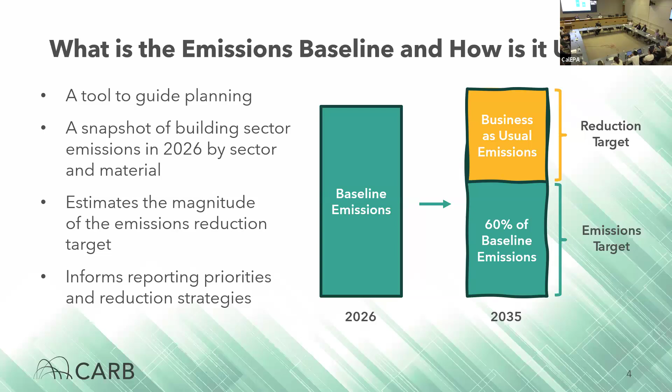Important: the baseline is a sector-wide emissions estimate. It is not an average or benchmark carbon intensity of specific building materials. Similarly, the 40% net reduction target does not mean that each building material will have a 40% CI reduction target. Material-specific benchmarks and material-specific reduction targets are a separate concept that will be discussed in the future.

Before we dive into the technical aspects of baseline estimation, let's briefly revisit the program's previous public engagements. Our first workshop was held in September 2024. In this workshop, we introduced the concepts of building decarbonization and embodied carbon and outlined potential program structures.

At this workshop, we received over 80 questions and comments on topics including EPD and LCA collection standards and methods, whether data must be specific to a facility or a product, which entities will be required to report, opportunities for standardizing and streamlining reporting, LCA accounting practices and system boundaries, the scope of covered building materials, and stakeholder education and outreach. Recordings and slide decks are available on CARB's website, and written comments were accepted after each workshop.

In March 2025, our second workshop expanded on the program's scope and addressed questions raised at the first workshop. Staff introduced data standards for EPDs and LCAs, outlined manufacturer and project reporting requirements, and provided an initial recommendation to develop a baseline using a top-down EEIO approach.

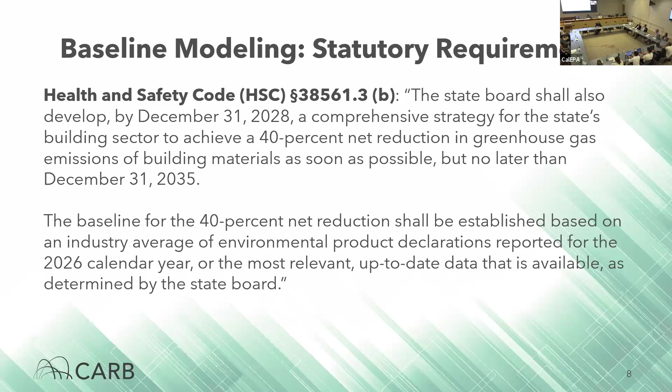The statute provides two options: an industry average of EPDs reported in 2026, or the most relevant up-to-date data as determined by the state board. That second clause, the most relevant up-to-date data, is important. It gives CARB flexibility to utilize alternative data sources and information in lieu of EPDs to establish a baseline.

The statutory language also uses some key terms that require definitions. These definitions should be familiar to many folks here, as similar definitions were presented in a prior workshop. These definitions have been updated to incorporate comments that were received since the last workshop.

Staff is considering defining building material as a physical product or system that is used or produced by the building sector, and typically used in the construction of buildings and infrastructure. This definition includes all end uses, for example, all concrete used in California, regardless of project type.

Similarly, staff is considering defining building sector such that it includes all economic activity related to product manufacturing and construction, renovation, maintenance, design, and siting of buildings and infrastructure. This reflects a comprehensive life cycle perspective.

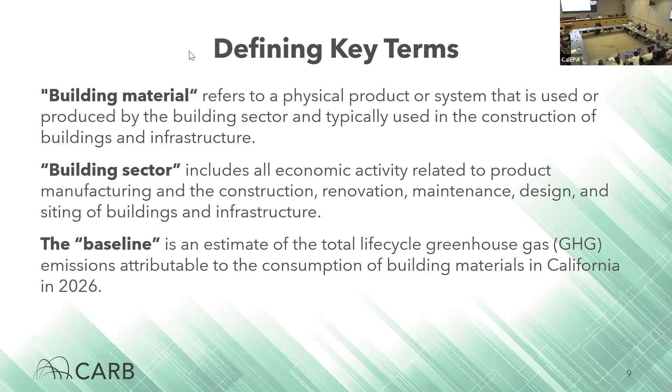Finally, staff have proposed defining the baseline as an estimate of the total life cycle greenhouse gas emissions attributable to the consumption of building materials in 2026, using the most relevant up-to-date data.

There are a variety of emissions accounting data sources that could be used to estimate the baseline. One emissions data source could be greenhouse gas emissions aggregated on a facility-specific basis. This sort of data is reported to governments annually and accounts for emissions from the total production of materials from each facility required to report.

Another source of data is product-specific life cycle assessments, which provide detailed emissions estimates for each unique building material for which a detailed life cycle assessment has been completed.

An emissions accounting approach that relies on product-specific LCAs could make use of EPDs and EPD reporting. However, reliance on EPDs poses several major challenges.

First, EPD availability and data quality is uneven, leading to comparability and consistency issues. Not only do many unique building materials lack EPDs, but they are also not held to universal, detailed standards for data transparency, verification, environmental attribute accounting, system boundaries, data vintages, or emission factor data sets.

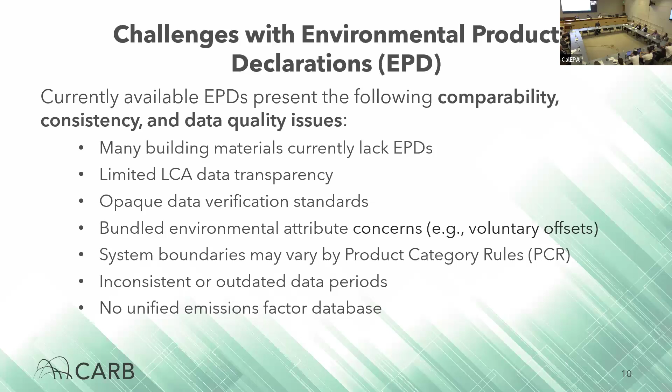Because of these limitations, staff flagged significant concerns with relying on EPDs to develop a baseline to estimate the 2026 emissions that may be attributable to building materials.

After weighing the options, staff proposed using an emissions data source corresponding to facility-specific rather than product-specific data. This has led to selection of an EEIO model, specifically US EEIO, as the starting point for estimating baseline greenhouse gas emissions. The pros and cons of this approach, shown in the table, were discussed at the March workshop.

As shown in this table, the main benefits of the US EEIO modeling approach are that the model provides a complete picture of building sector emissions with minimal omissions or double counting. This concern would exist for most bottom-up modeling approaches using EPDs or other LCAs.

One drawback of the US EEIO approach is that its data sets are fully updated only on 5-year intervals, and the EPA has signaled that it will no longer maintain US EEIO. However, development and updates to US EEIO are expected to continue through a consortium led by Stanford University and private partners. Data vintage concerns are not unique to US EEIO data sources, but also extend to EPDs, which may have primary data that is up to 5 years old, as well as significantly older background data.

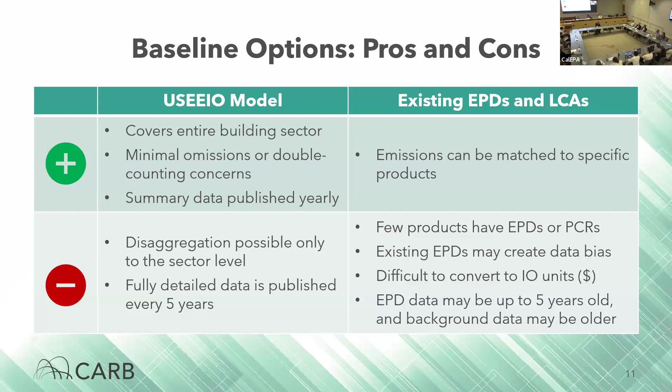So, what does this EEIO approach to estimating baseline emissions look like in practice? Conceptually, the total economic demand for California building materials is multiplied by their sector-specific greenhouse gas emissions intensity. The greenhouse gas emissions intensity is derived by aggregating facility-specific data. These data come from facility-specific measurements that are reported to governments and attributed to specific industrial sectors. Each sector's aggregate greenhouse gas emissions are mapped to the overall economic output from that sector, using government-issued data sources. The result is a statewide estimate of emissions attributable to building material usage in the state.

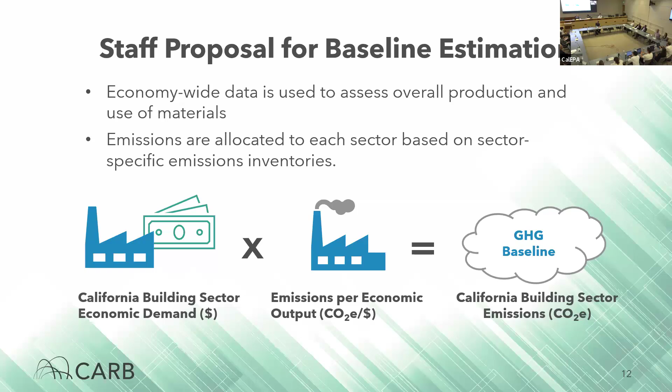A key analysis choice is deciding which life cycle stages to include. Staff propose covering A1 through B5, which includes raw material extraction, manufacturing, transport, installation, and ongoing maintenance and replacement for buildings and structures. Stages beyond B5, like operational energy and end-of-life disposal, are excluded, as they are likely to add significant additional modeling complexity and account for only a small increase in additional emissions, with little opportunity for the building sector to control or reduce.

I will now hand this presentation over to my colleague, Jeff Kessler, who will discuss input-output modeling in more detail.

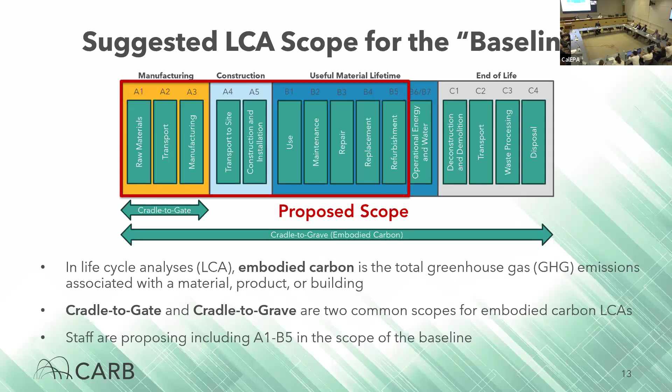Good afternoon, everyone. I'm Jeff Kessler, the staff air pollution specialist in the Embodied Carbon Programs Analysis section. The first part of today's meeting reviewed the key considerations for developing a baseline estimate for building material emissions. All material from today's presentation has been posted online. Some of the material presented today has been repeated from prior workshops. We encourage all of you to familiarize yourself with the two prior public engagements if you have not already. Recordings from these past workshops are also available online if you'd like to revisit them.

I'm now going to cover some material to further set the stage for how CARB staff intend to use the baseline and the methodological underpinnings for the emissions assessment work we are doing to establish the baseline.

First, it is important to understand the context for how the baseline will be used and how it relates to the data we plan to start collecting from entities that will be required to report to our program. The baseline serves two important roles for the Embodied Carbon Program. First, it helps to reveal the products or industries with the highest emissions, where emissions are concentrated in the building sector. This helps CARB staff identify key reporting and submittal requirements that will ensure that the highest emission subsectors and materials are being reported to CARB.

Relevant and accurate reporting is essential for CARB to track progress toward any future emissions reduction targets that may be established. Second, the baseline modeling approach being developed by staff provides sector-specific emissions intensities that are relevant to specific building material industries. Due to this level of disaggregation, the baseline and baseline methodology will be used to help identify how different policies, programs, and future regulations can be used to achieve an overall 40% net reduction in greenhouse gas emissions for the building sector.

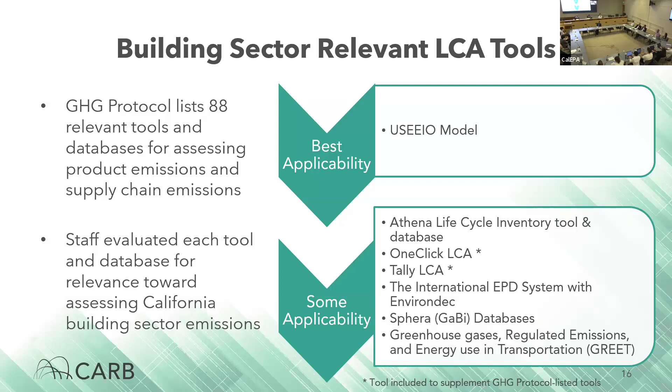The economy, and perhaps the slide, is strikingly complex. To estimate the life cycle emissions associated with building materials, it is necessary to understand how different energy and material flows across the economy and is used to ultimately create a building or structure. Input-output analysis is a powerful approach that has been developed to understand and to quantify the interconnectedness of the economy and the various sectors. Building a house, for example, involves not only procuring lumber and concrete, it also involves the production of cement from the mineral products manufacturing sector, aggregates associated with mining, and electricity procured from electric utilities. Each of these upstream activities has its own procurement pathways associated with their upstream emissions.

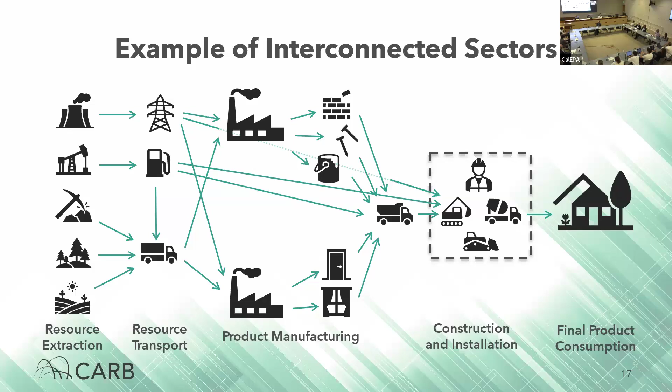Input-output analysis is a mathematical approach that is used to map the overall relationships for interconnected industries. When input-output analysis is incorporated into a life cycle assessment framework, it can help us better quantify both the direct and indirect emissions associated with building materials used to construct buildings and structures. With that context, let's look more closely at how input-output analysis works and why it provides such a strong foundation for estimating an emissions baseline.

An input-output model captures the ripple effects of an economy. That is, the output from one sector is contingent on a very complicated set of producers providing different goods and services that will all need to change their own levels of production to satisfy an increase in demand from a different sector. Think of it as a network of transactions. Sectors buy inputs from each other, transform them, and sell outputs to consumers and other customers. These transactions are called inter-sector flows. For example, natural gas sold to the cement manufacturers is one such flow.

Not everything produced in the economy ends up being consumed as final demand. In fact, most economic outputs end up being consumed by other businesses as intermediate goods to create additional goods or services. Final demand refers to something very specific and only covers the set of goods and services that are not used as intermediates. Final demand is primarily carried out through consumption by private households and government purchases. To keep these flows organized, IO models rely on classification systems like the North American Industry Classification System, or NAICS. This standardizes how industries are defined and classified across the economy.

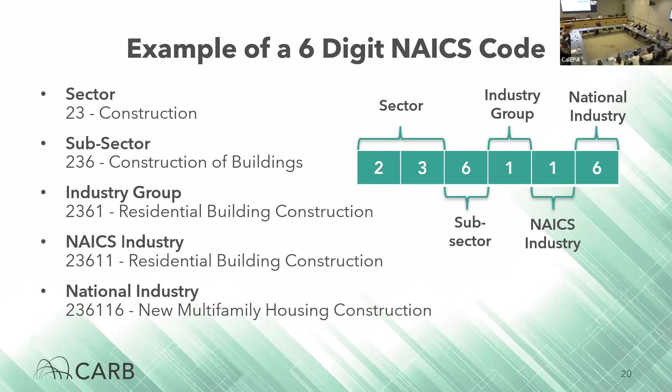NAICS codes classify businesses by the work that they do. The first two digits represent broad sectors, and each additional digit adds specificity down to individual industries. Government uses NAICS to collect economic data, and businesses use it to benchmark markets and qualify for different contracts. The system is updated every 5 years to stay relevant to new industries. NAICS is a key system used for aligning emissions data with the right economic sectors in the environmentally extended input-output model, which we will be discussing in more detail in just a little bit.

The IO model framework was developed by a Nobel Prize-winning economist, Wassily Leontief, who developed the first systematic method to trace the interdependencies of a complex global economy.

Input-output analysis is all about connecting the dots between industries and quantifying the flows of goods and services across the economy. For example, producing a car isn't just about the auto sector. It involves steel, energy, transportation, and electronics, which are all industries that are reliant on other industries in the economy to function. IO models capture both direct and indirect inputs, giving us a full picture of the resources that the economy must provide for a given sector or industry to continue to produce goods and services.

Today, CARB and other government agencies rely on input-output models for economic forecasting. This includes things like estimating the number of jobs that may be created or destroyed by a given program or policy. CARB uses tools like REMI, an input-output modeling tool, to meet the requirements of the Administrative Procedure Act to quantify the economic impact to the state and its businesses that a given policy might have.

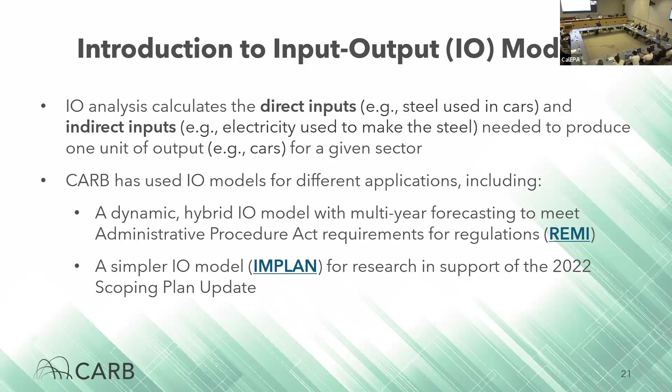CARB has also made use of the IMPLAN model, another input-output tool, to evaluate and estimate health and other impacts that different scoping plan scenarios may have. The IO modeling methods use linear algebra to mathematically quantify the economic flows between sectors and to determine the overall input needed for the economy as a whole to meet the production needs from a given sector.

The economic data used for input-output modeling starts as a large table and is transformed into matrices that describe how much direct input each sector needs to produce 1 unit of output. Total output tables show the gross value of production from each sector, or the total economic output that a sector has produced in a given year. This includes both intermediate goods sold to other sectors as well as final goods sold to consumers, governments, or for export.

Intersector flow tables map the transactions between sectors. For example, they quantify how much the construction industry purchases from cement, steel, or insulation manufacturers. This direct input is quantified based on economic data associated with purchases made by companies that make up the sector. These data are collected by the federal government. Final demand tables isolate end-use consumption. These tables track how goods and services are consumed by households, government, and exports, separating final demand from intermediate use by other industries.

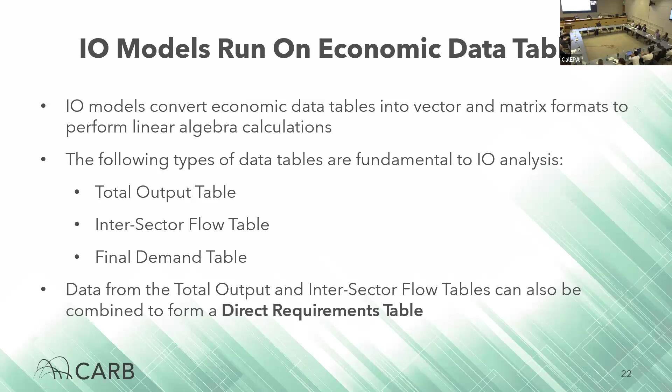The direct requirements table, also known as a technical coefficients table, standardizes input needed per single unit of output. It shows for each sector how much direct input is required or purchased from every other sector to produce 1 unit of output. This table is essential for the linear algebra that quantifies both direct and indirect economic and environmental effects. The next several slides will break this down in more detail.

The direct requirements table shows the direct inputs needed from other sectors that are necessary to make $1 of output for a given sector. It is easiest to think of this as the line item purchases that a business ultimately needs to operate on a day-to-day basis. For instance, construction entities making commercial structures will need to procure lumber and other goods. There are numerous other direct inputs that will be necessary for a construction entity to produce their economic output, typically a structure or building. Similarly, a lumber manufacturer may also require dimensional lumber to maintain structures that are fundamental for use to conduct its business, among many other outputs from other industries.

The direct requirements table normalizes the total demand for inputs by the total economic output for each industry. That is, the total receipts or direct inputs to a sector is divided by the total economic output from the sector.

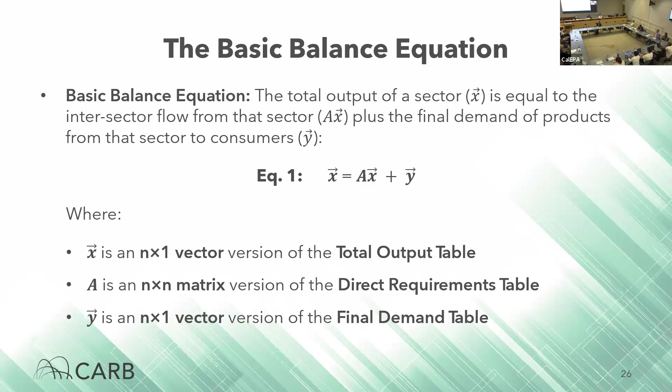When taken all together, this equation states that the total output from each industry in the economy must be equal to the total demand for intermediate goods, as well as the total demand for goods that are sold directly to final consumers, such as private households and the government. As may be evident from this equation, the amount of output a given sector needs to create is dependent on the amount of output that other sectors also need to create to satisfy the total economic demand for all goods and services within the economy.

Next, we'll go over some linear algebra that is done to simplify this equation. The first step is to rearrange the equation to solve for x, that is, the total output from the economy. Because this is done using matrices, we end up with the inverse of the identity matrix less the direct requirements matrix. This inverted term is then multiplied by the final demand vector, y. To simplify this expression, the inverse of I minus A is defined as a Leontief matrix, or L matrix. The character L is directly substituted into equation 2, which results in what we have written for equation 3.

Now that the math is out of the way, let's consider what the L matrix represents. The L matrix is the most important component of input-output analysis, as it represents the total requirements from the economy, both direct and indirect, or upstream economic requirements that are necessary to meet a unit of final economic demand. Because of the equation rearrangement, this matrix carries the full life cycle mapping from all the economic productivity from the economy to meet final demand.

In other words, because the total output from an economy, x, is a function of the intermediate demand for that output, as well as the final demand for that output, the L matrix establishes the relationship for how output across the entire economy must change to ensure that the final demand for goods and services is met, when considering the interconnectedness of inputs across all sectors of the economy.

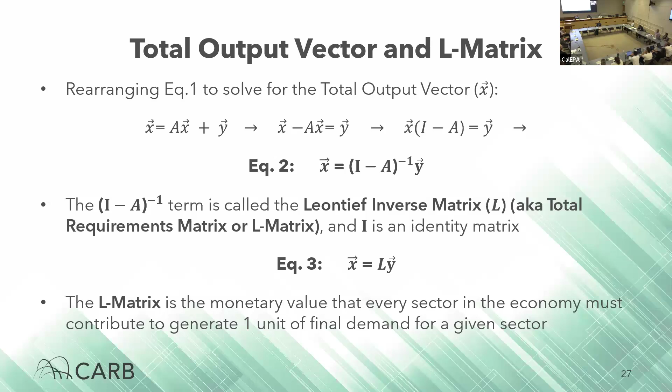Over the next several slides, we'll move from input-output basics into environmentally extended input-output models, or EEIO.

EEIO is how we connect environmental flows, like greenhouse gas emissions, to the economic transactions and relationships we just discussed. This is what allows us to establish a credible, California-specific baseline estimate.

EEIO models expand input-output models by layering in emissions and waste streams. These include air pollutants from factories and power plants, water pollutants from industries and in agriculture, solid waste from extraction and manufacturing, and greenhouse gases like carbon dioxide, methane, and nitrous oxide.

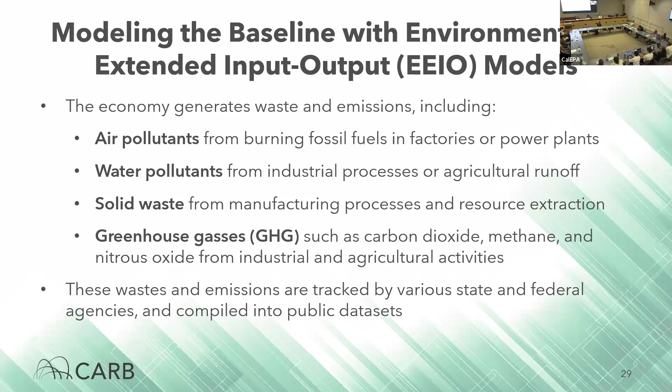These data come from federal and state inventories, which we link to the input-output structure so emissions can be traced back through supply chains.

In input-output terms, the Leontief matrix L tells us all the inputs, direct and indirect, that are needed to meet 1 unit of final demand. When we map emissions data onto those flows, we can assign emissions to every dollar moving through the supply chain.

Here is a concrete example. In the 2017 USEEIO model, for every $1 of ready-mix concrete, represented by NAICS 327320, there is a direct requirement for cement, electricity, and limestone.

However, most sectors in the economy must also produce some amount of goods and services in order to satisfy the direct input that the ready-mix concrete plant requires. For instance, 16 cents of cement is needed, both directly and indirectly, to produce $1 of concrete.

Cement manufacturing contributes emissions primarily due to calcination of limestone and combustion of fuel. 3 cents of electricity is also needed across the supply chain.

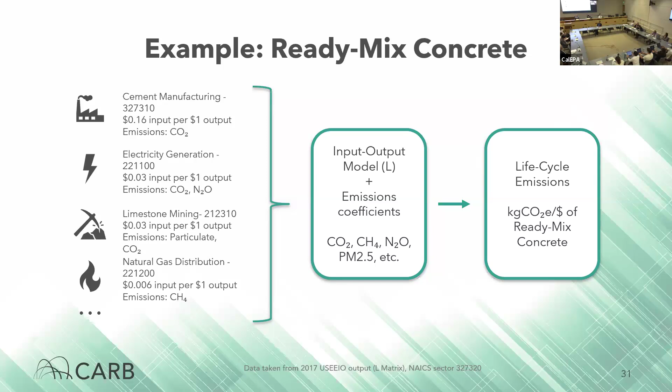EEIO rests on 2 building blocks. First, environmental satellite tables, which quantify emissions and waste that are associated with total production from each sector, and life cycle impact assessment factor tables, which convert gases, such as kilograms of nitrous oxide, into carbon dioxide equivalents using global warming potentials.

Combining these tables produces direct emission factors for every sector. We will now go into this more in detail over the next several slides.

Environmental satellite tables measure the annual quantities of emissions for greenhouse gases, as well as other air pollutants and wastes at the sector level.

Staff rely on programs such as the EPA Greenhouse Gas Inventory and CARB's mandatory greenhouse gas reporting regulation to populate these tables. On the right here is an example for NAICS 236, representing the construction of buildings. It lists species and annual emissions in kilograms like carbon dioxide, several HFCs, methane, and nitrous oxide.

Only species with emissions reported for this specific sector are shown on this slide. Other inventoried species may not have sector-specific flows or may fall below reporting thresholds.

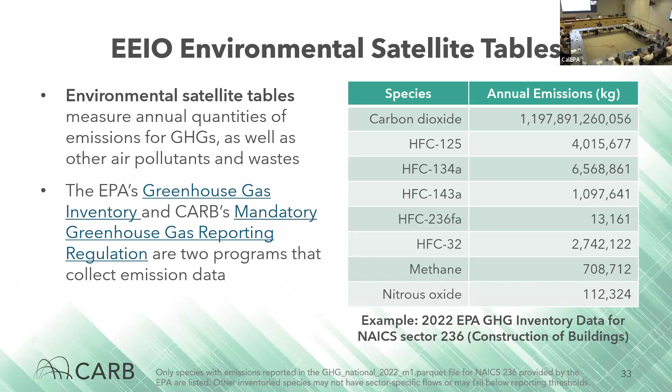To put different gases on the same scale for measuring environmental impacts like climate change, EEIO applies life cycle impact assessment factors. The 100-year global warming potentials from IPCC and EPA TRACI can be used to convert methane, nitrous oxide, HFCs, and other chemical species into CO2 equivalents.

Using a consistent set of indicators allows for comparisons of totals across sectors and over time, and changes to the set of global warming potential values, like switching from older IPCC values to more recent ones, such as those in AR6, can be transparent to stakeholders.

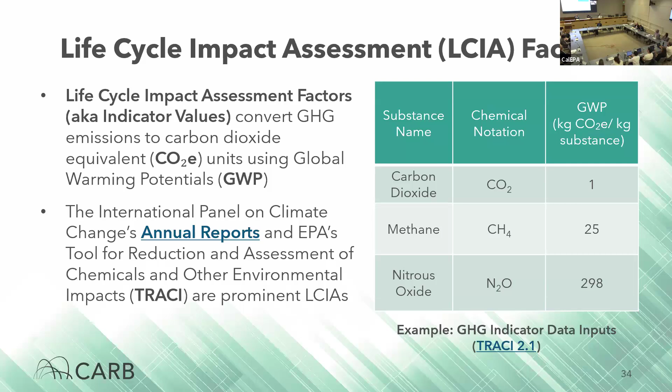EEIO rewrites the input-output identity we saw to solve directly for environmental impacts. It uses the relationship X equals L times Y, which represents the total output needed to satisfy final demand. And it attaches emissions with the equation E equals C times B times X.

Here, the C matrix represents the life cycle impact assessment factor, which is a matrix of global warming potentials, converting the mass of each gas to carbon dioxide equivalents. B represents satellite data, which is a matrix that quantifies direct emissions from each sector per dollar of sector output, for instance, kilograms of methane per dollar of product produced.

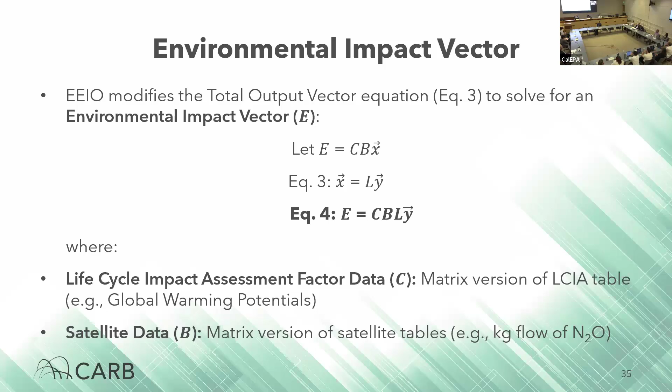With B in kilograms of gas per dollar and C in kilograms of CO2 equivalent per kilogram of gas, the resulting emission matrix E is in kilograms of CO2 equivalent per dollar of economic output.

EEIO simplifies the impact equation we saw by combining characterization and emissions into one term. It defines D equals C times B, collating the LCIA factor and satellite emissions coefficient into a single matrix of direct, Scope 1, impact intensities per unit of sector output.

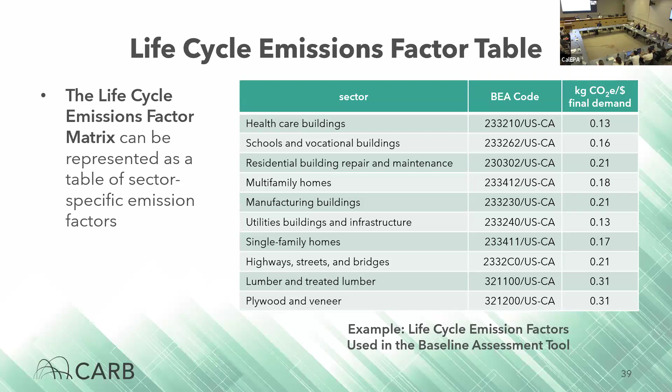In this section, we'll introduce the modeling backbone for estimating the baseline. Staff will walk through the national US EEIO model and general details about the state IO model, and then how they work together to produce California-specific life cycle emissions estimates. The goal is transparency and reproducibility, so that anyone can follow the steps that lead to generating a baseline emissions estimate for California's building sector.

US EEIO is a nationally representative EEIO model of the US economy. It calculates both direct and indirect environmental impacts. It was developed by the EPA and can be used to support life cycle assessment, policy analysis, and sustainable materials management.

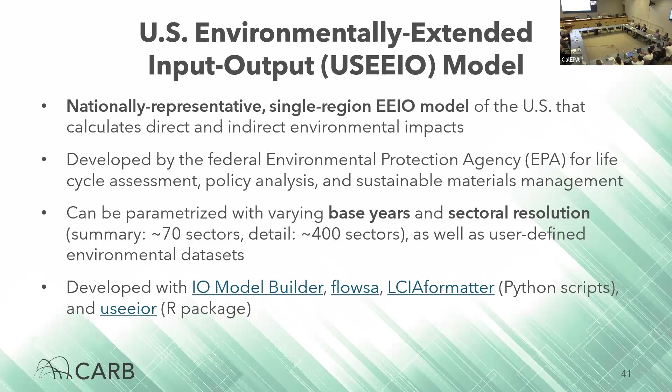Staff can adjust the model by base year for the data used, sectoral detail, about 70 summary sectors or 400 detailed sectors, and environmental datasets. For implementation, staff relies on EPA's open source tools: flowsa, Input-Output Model Builder, LCIA Formatter, and the useeior package.

The approach links economic structure to environmental data using consistent codes and tables. The L matrix that we've seen is derived from BEA input-output accounts and gross output by industry tables. It gives total economic requirements to produce $1 of output from each sector.

The D matrix is assembled from federal and state environmental datasets and characterized with LCIA factors to represent direct impact intensities per dollar of output from each sector. The life cycle emissions are mapped by BEA codes with BEA to NAICS crosswalks so each sector's direct and upstream impacts can be estimated.

The US EEIO model makes use of specific government datasets to conduct the input-output analysis. The BEA make and use tables are the foundation for this input-output analysis.

The make table, V, shows which industries produce which commodities, providing an estimate for the total economic output from each sector. The use table, U, shows which industries and consumers purchase those commodities, providing an estimate for the total economic demand for outputs from each sector.

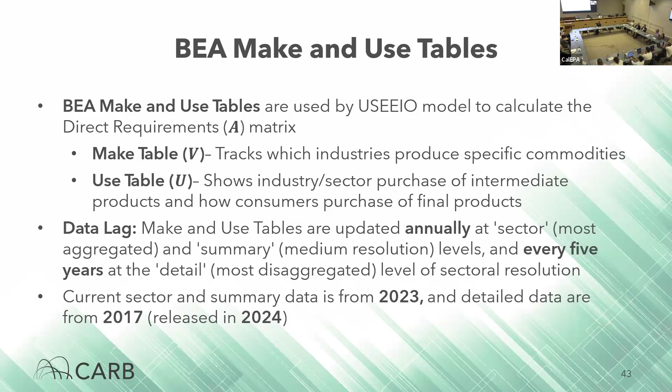State IO is used to adapt the US EEIO model we've just seen to a specific state. It is used to generate a two-region input-output model, the state of interest and the rest of the US. This separation allows us to distinguish in-state production from domestic production that is imported into the state.

The two-region model is built from national input-output tables and state industry trade data. This is then combined into a usable EEIO structure with flowsa, the EPA tool that maps emission inventories to specific economic sectors and industries.

The two-region model has a resolution initially at the BEA summary level, which is roughly 70 commodities per region, rather than the approximately 400 in the detailed one-region model.

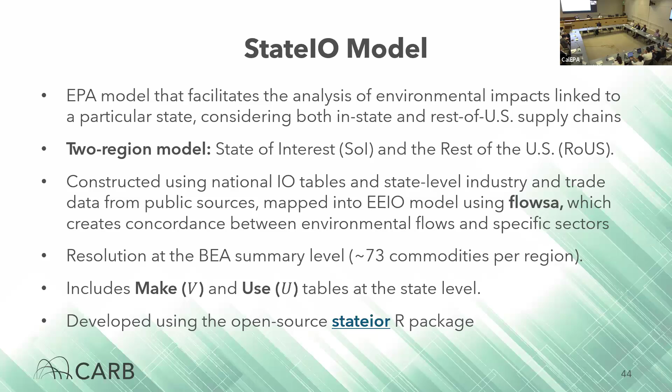Staff use the state IO R package to create a two-region input-output model that is specific for California. This is our starting point before applying CARB customizations.

US EEIO also incorporates international imports. Imports do not use the US emission factors. Instead, staff rely on a multi-region input-output model to parameterize the import emission factors. Currently, staff have parameterized import emission factors using EXIOBASE data, aligning with the work that US EPA has previously done to integrate import emissions into the US EEIO model.

Commodities are linked to their country of origin and paired with country-specific emission intensities. This improves accuracy for consumption-based accounting.

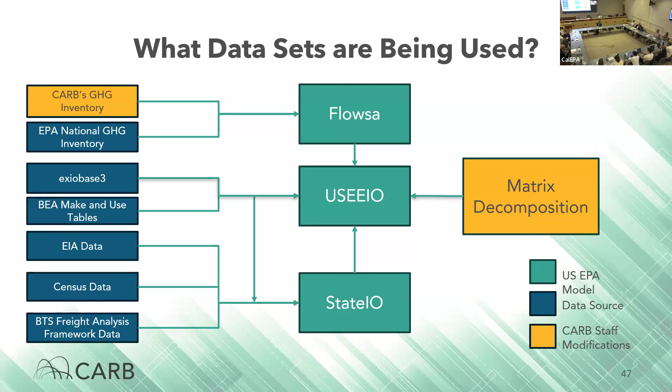CARB's matrix decomposition, shown in yellow here, takes the California summary results and redistributes them to 400 plus detailed sectors using national detailed shares, preserving California emissions and economic totals while adding additional detail that is incorporated into the baseline assessment tool.

So there are two targeted changes. The first modification is the integration of CARB's GHG inventory. Staff replaced EPA's default state emissions inventories for California with CARB's officially released inventory, which covers greenhouse gas emissions through 2022. This is the most recent public release of the California greenhouse gas emission inventory.

The emissions inventory data for each activity have been mapped directly to Bureau of Economic Analysis codes, which uses the NAICS system to ensure that emissions can be attributed to specific California industries.

The second significant modification CARB staff made is a matrix decomposition to provide increased resolution for emissions that may be attributable to specific sectors. Staff disaggregated State IO's 70 summary sectors into 400 plus detailed sectors. This adds precision for building materials while preserving overall California emission totals that are affiliated with more aggregate sectors.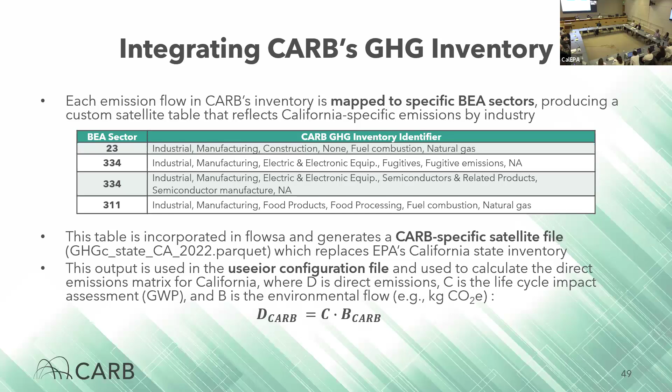The useeior configuration incorporates this California-specific file to compute a California direct emissions matrix using the relationship D equals C times B, where C is the GWP characterization and B is the CARB satellite data in kilograms of gas per dollar of economic output. The result is a direct impact value that shows the greenhouse gas emission impact per unit of economic output in California.

The second modification is to change the level of disaggregation presented in the direct requirements matrix. To compute the total economic need for inputs, the direct requirements matrix is multiplied by the total demand for output from that sector, which gives the input matrix presented in the equations here.

The idea is to keep demand for California's sector at an aggregated level constant, but to redistribute overall demand for sector inputs across detailed subsectors consistent with the economic requirements for the US as a whole. Doing this assumes that industries producing output in California require a similar percent breakdown of detailed inputs from the economy as would be required for that industry on average in the US.

Staff first takes the National Detailed Input Matrix for 2017 and compute for each detailed pair ij the share of input within its parent summary sector. This gives an overall breakdown for how economic activity within a given sector corresponds to its aggregate summary sector.

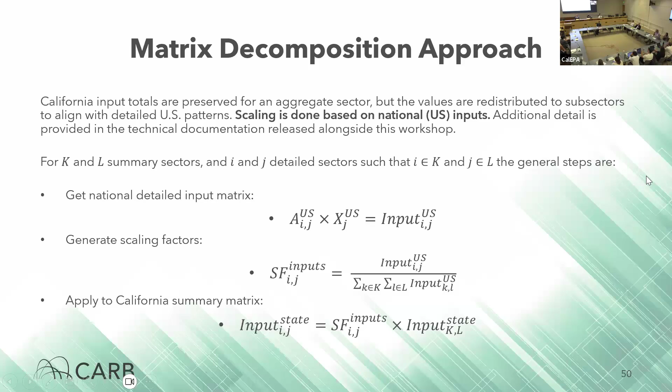Staff repeats the same approach for emissions. Using a national detailed results, staff compute detailed emission shares within each parent summary sector, and then scale California summary emissions to detailed sectors with those shares.

From the detailed input and emissions, staff derive California's detailed model matrices: the detailed direct requirement matrix, denoted here as A state; the Leontief inverse matrix, L state, using the relationship L equals the inverse of the identity matrix minus A state; and finally, the D state matrix, giving detailed direct emissions factors per unit of output.

All of this yields the full output for California at a detailed resolution, 402 sectors instead of 71, ready to be used for baseline estimations.

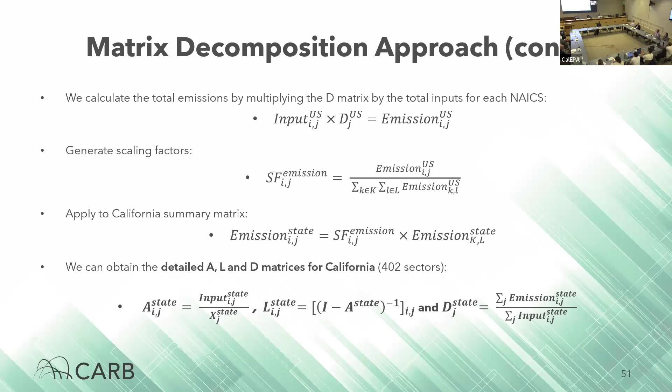Staff have built an Excel front-end, the baseline assessment tool, that presents the results from our California-specific EEIO model at the detailed sector resolution. It loads California's detailed A, L, and D matrices in it, so users can see and work with them directly. Results from the customized California EEIO model are incorporated into the workbook, returning applicable emissions estimates.

The estimates in the workbook have also been scaled so that they represent detailed emissions estimates for the baseline for 2026. In practice, one can select the relevant construction final demand categories and different years to project out demand for those sectors, review the underlying emission factors, and produce baseline emissions for a subset of years in a transparent, auditable format.

The tool is intentionally simple. It displays the calculated intensities, multiplies them by the chosen California demand, and reports lifecycle CO2 equivalent values consistent with the modeling.

In the current version of the tool, staff propose to estimate the baseline using lifecycle stages tied to materials manufacturing, installation, and maintenance. The scope covers A1 to A3, representing raw materials, transport, and manufacturing of building products; A4 to A5, representing transport to site and installation; and B1 to B5, representing use, maintenance, repair, replacement, and refurbishment over the useful material lifetime. A1 to A5 stages are captured primarily by the construction sector, denoted by NAICS code 23, while B1 to B5 stages are captured through other sectors in the EEIO model. The results show baseline emissions focused on manufacturing, installation, maintenance, and repair impacts, excluding operational energy and end-of-life stages.

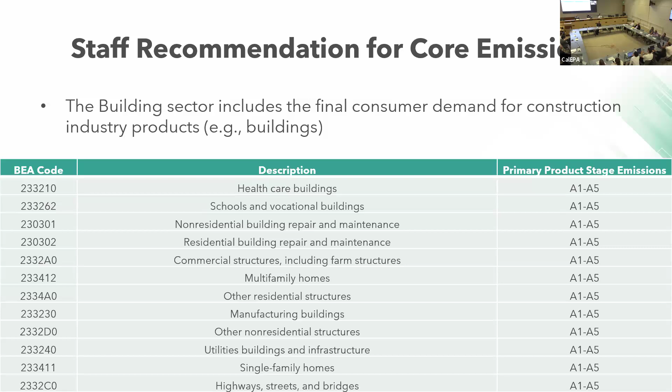Staff propose that the building sector capture the final consumer demand for construction industry products, representing what the construction industry delivers as a finished output. That includes entire building types and major structure categories like healthcare and school buildings, residential and non-residential repair and maintenance, commercial and other non-residential structure, multifamily and single-family homes, utilities buildings and infrastructure, highways, streets, bridges, and manufacturing buildings.

Staff also include a small set of additional products that households buy directly, so we can represent B-stages B1 to B5 more completely. This table lists the specific BEA codes and products: lumber and plywood, windows and doors, veneer and engineered woods, clay, ceramic and glass products, cut stones, miscellaneous fabricated metal products, construction machinery, and selected HVAC equipment. We also include housing services, owner and tenant occupied, and architectural engineering services, where they help represent B-stage activities.

I will now pass this off to my coworker, Jeff Kessler, to discuss the baseline assessment tool that staff have created. Thanks for that, Leo.

I think maybe for those in the room as well, you might just want to stand up for a second, and then we can sit back down. It might create some revitalization. So I'll give you just a couple seconds to stand up and stretch a little bit before we dive into this last section. Those online might also like to do that.

Great. Thanks all so much.

So at this point, we've reviewed the structure and approach for how staff intend to estimate the baseline and the modifications made to the underlying models to ensure that the baseline estimate reflects the best available data for California. Next, we're going to walk through the baseline assessment tool that staff created. This is an Excel-based workbook, so hopefully it's accessible to everyone, and it compiles the results of the CARB-modified USEEIO model and applies some additional scaling and aggregation considerations to estimate the baseline emissions for the 2026 year.

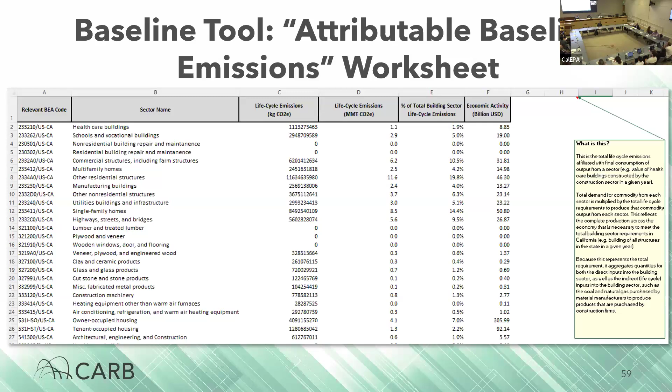Because this represents the total requirements, it aggregates quantities for both the direct inputs into the building sector, as well as all those indirect or life cycle inputs needed by the building sector, such as the coal and natural gas purchased by material manufacturers to produce products that are then purchased by the construction firms. I will now pass this over to Jeremy Loeb to lead us into the public discussion session.

Thank you, Jeff. Just a few more slides before we get that started. We are now going to spend an hour, or plus or minus, on public discussion. We invite the experts in the room to ask questions and to provide recommendations based on the technical details of the work that was presented today before we open the floor to a public comment period. Staff will serve as moderators for the discussion and can respond to questions to clarify work we have done as needed.

Online, we have a few attendees that have been marked as panelists so that they may better participate in the public discussion. This includes Wes Ingwersen and his colleagues that have been instrumental in developing and creating EPA's US EEIO model. So if you would like to add to the conversation, please raise your hand. There are microphones placed around the room, which are important for making your voice heard in the room and for online attendees. So please do speak clearly into the microphone.

If your question is not related to the technical details of modeling and is better suited for the public comment period, you will be given the opportunity to comment during the public comment period. For online attendees, you will have the option to participate during a public comment period at the end of the meeting. We will also be opening a public docket on the CARB website to facilitate written comment submittals. After today's meeting, CARB will also post a template on the Embodied Carbon website that can be used to help provide specific technical feedback that directly relates to the disaggregation percents that CARB has used to estimate detailed emissions.

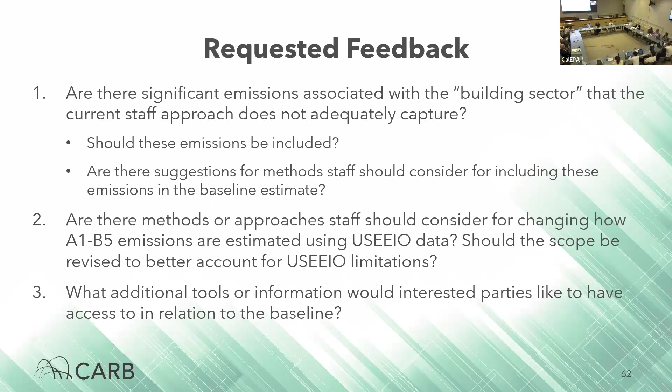For one, we're guided by the statute. The statute says to develop a strategy to reduce net GHG emissions in the building sector by 40% by 2035. And so that's the broad guidance. Specifically how we do that is through the strategy that we develop. We haven't figured out those details yet. We're still at that stage of what are the total emissions, what are the sectoral emissions.

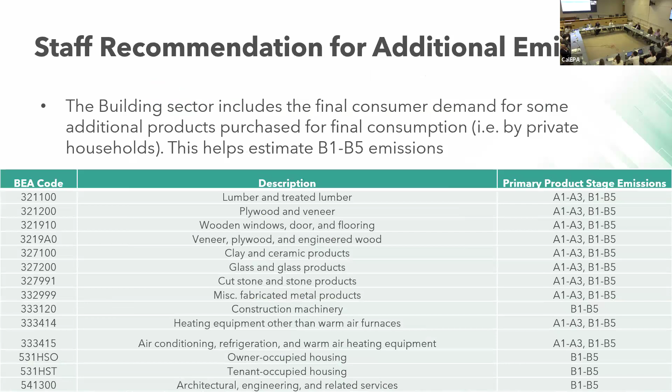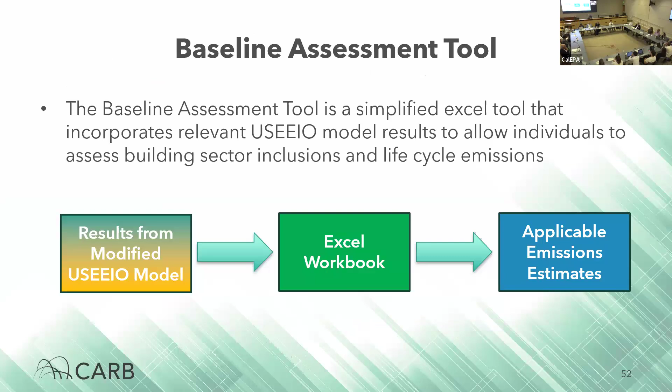That leads to the next step, which is to develop a reporting regulation, which we're hoping to bring to the board next year. That'll get specific data, hopefully, from manufacturers of the products we will have identified in that regulation, so that we have not macro data guiding those future regulations and whether people are complying, but micro data. So, facility level data, builder level data. And so that's the reporting information that we're looking to develop.

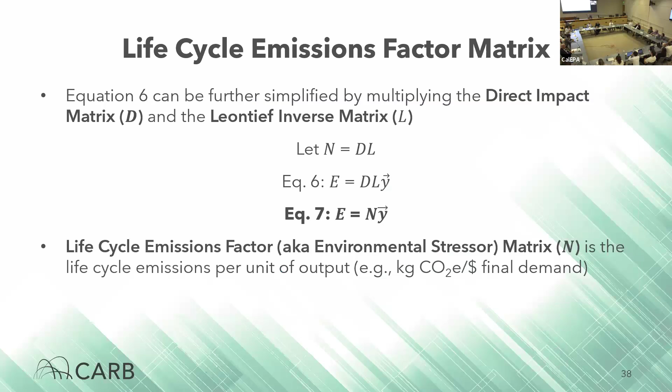And then on your, I can't remember if it was your last or your intermediate point, about whether we're going to ask builders to make specific decisions or whether we're going to ask manufacturers to make specific decisions, or both, or something entirely else. That's something we will determine through our strategy development. So we're not at that stage yet of making any decisions there. It's sort of like a blank slate at this point.

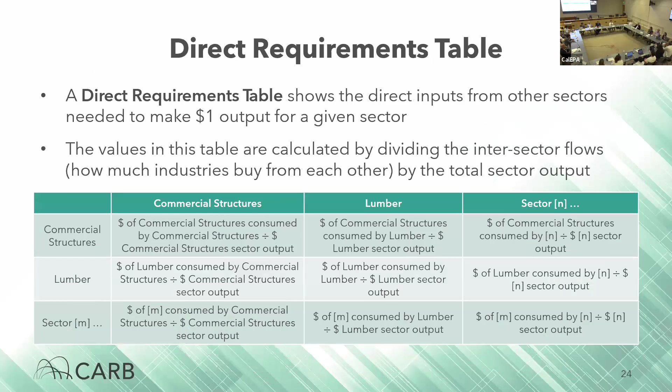Doesn't move. Hi, I'm Webley Bowles with WIP Sustainability. So I want to stay on that because I'm not hearing exactly what I want to hear. And I feel like it's an elephant in the room that I just need clarity on. Like, this meeting is about baselines. I understand that. It's not about reporting.

So I want to understand, how do we reduce the baseline? Like, what are the mechanisms that we can use within EIO to reduce the baseline? And it's my understanding that that needs to be economic. That's the only way to reduce that baseline. And I'm not seeing in any of these comments that people are saying that we want to reduce the economy. So what are the other mechanisms to reduce that baseline?

Yeah, so I kind of have to just address the core philosophy of the question, I guess. There's no reduction of baseline that we're talking about here. We're talking about trying to understand what the emissions of the building sector will be in 2026 through the utilization of data that is existent, and then projections to that 2026 year. So it isn't about how can we reduce the baseline. The baseline's just a number of what we think emissions will be in 2026.

There's a whole other thing about strategy that we're going to have going forward for how we reduce emissions from the baseline to achieve our 2035 goal of the 40% net GHG emissions. So there won't be any baseline reduction. That's just not a thing. It'll be reduction from the baseline. Can you state that again?

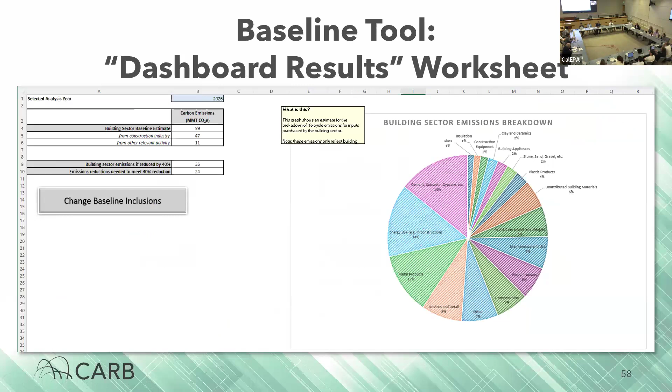Please do. If I may add my comment to your question and maybe comment to your answer, I feel like today's session is to seek feedback, seek kind of criticism to the findings of this tool. So basically, when Andrew and Jeff and Lex talk about the pie charts, CARB wants to seek industry experts' feedback on, does the ranking look good to you? Does it make sense? Is there something that should be ranked in the third place instead of in the first place? That will basically be the flaws of such a model.

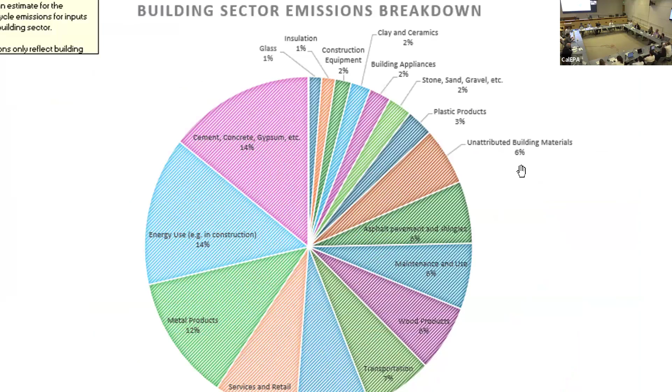That feedback from industry can help CARB correct a model, fine-tune a model, and then eventually use this model or the findings from this model to guide how to set up the regulation for reporting mechanism. Is that the right interpretation? Okay. I see Matt, and then I see Webb, and then I see Megan.

I also think, just building off of your question, David, that you're talking about how you can use that model to identify within your operations how to reduce emissions. I think that might be 2 or 3 steps ahead of what that pie chart and model is intending to be used for. So if anybody is walking in and not knowing anything about GHG emissions, then they can look at that and then rank themselves relative to other industries.

But if you're already at a step where you know you want to drive emissions down in your operations, you probably want to do like an organizational life cycle assessment, hotspot analysis, and decarbonization strategy for your own operations, which would be doing a bottom-up assessment of your operations to identify what are the leading drivers of emissions, and then what are the easiest ones or the ones with the largest reduction potential. And then you target those ones.

And then you can use that within your EPDs for your products and your corporate reporting to then drive emissions and then show your corporate due diligence in the fight against climate change. Just a quick response. And we do that. We've done that, and we continue to do that. So how is that represented, or how will that be represented? Maybe not obviously in this meeting, but in the future.

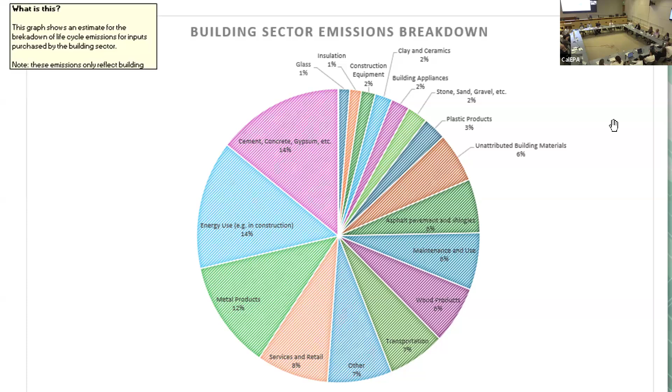I don't know if Reed wanted to get back, let's go to Webley, and then maybe back to Reed. Webley, WAP Sustainability again. I have a question about how you're accounting for A1 through A5. Is that what you're doing? Within the chart you're looking at, how is that being captured now at this baseline stage, and how is it going to be considered in the future? Well, let's just talk about the baseline.

The way to think of this is if I'm a builder producing a residential house, my final demand is that unit of residential housing. If I do the life cycle emissions for that purchase using the USEEIO model, that gives you the complete life cycle emissions up to the time the house is sold. So the construction of that house, A1 to A5, would effectively be covered just from including the construction sector within the USEEIO model.

For the B stage, those are the use stages, basically everything that happens after the purchase or sale of that home. For that, we start looking at the final demand of the other sectors in the economy. So for an A1 to A5 estimate in our tool, you'd just toggle the construction sector. For B1 to B5 series emissions, you have to start toggling non-construction industries to get the consumption affiliated with those industries operating as part of the building sector — purchases made by non-construction entities.